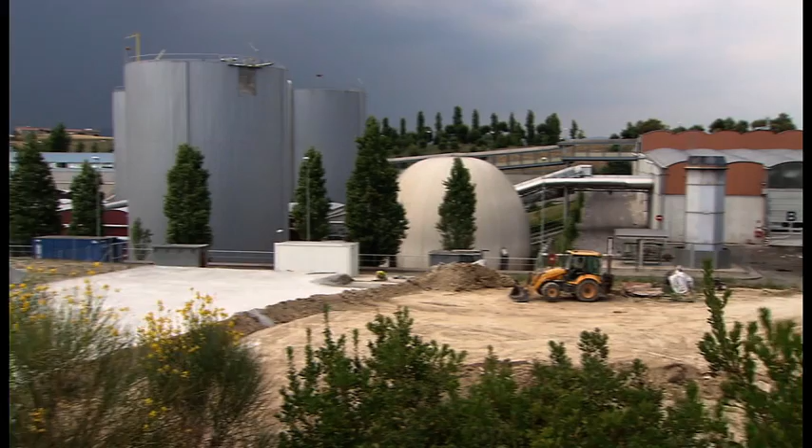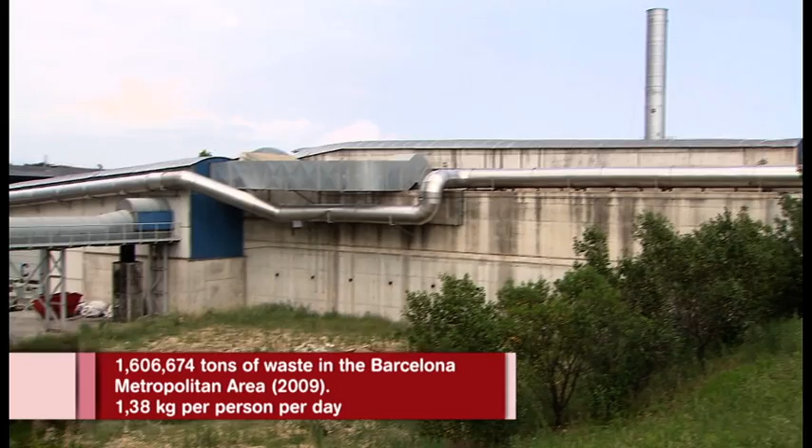The Montcada i Reixac Eco-Park forms part of the group of installations foreseen in the 2009-2016 Metropolitan Municipal Waste Management Programme by the Metropolitan Water Services and Waste Treatment Authority, also known as the Barcelona Metropolitan Area Environmental Authority. The Environmental Authority manages public services concerned with the integral water cycle and solid waste treatment in the Barcelona metropolitan area.

It serves more than 3,100,000 people in the 33 municipalities making up the area. The Montcada i Reixac Eco-Park itself treats the waste from Badalona, Badia del Vallès, Barberà del Vallès, Barcelona, Cerdanyola del Vallès, Montcada i Reixac, Montgat, Ripollet, Santa Coloma de Gramenet and Tiana municipalities, though it can accept waste from other places when necessary to guarantee proper management.

The Montcada i Reixac Eco-Park is a facility financed by the Environmental Authority, the Generalitat de Catalunya Catalan Government and the European Union, and can handle 287,500 tonnes of waste a year. The plant treats municipal waste from selective collection of organic waste, packaging and the residual waste from the municipalities mentioned above, with the object of turning organic remains into compost and biogas and recovering still usable material from all fractions for recycling.

At home, each one of us generates a large quantity of waste in the form of organic matter, such as food scraps, corks, or coffee grounds. So it can be treated and subsequently recycled, we must separate it correctly and put it in the right container, the brown one.

At the same time, we also produce other types of waste that cannot be recycled, like the dust from sweeping, nappies, or cigarette ends. However, this refuse also needs to be properly managed, which is why it has to be separated from the other waste and put in the container for the residual waste, the grey one.

The municipal dust carts are responsible for collecting each fraction and taking it to the treatment plant, in this case, the Montcada i Reixac Eco-Park.

These vehicles carrying organic waste and the residual waste to the plant go over a weighbridge before unloading the material. These entry and exit weighbridges provide a record of which municipality the lorry came from, the amount of waste entering the facility, and the recyclable and rejected material leaving it.

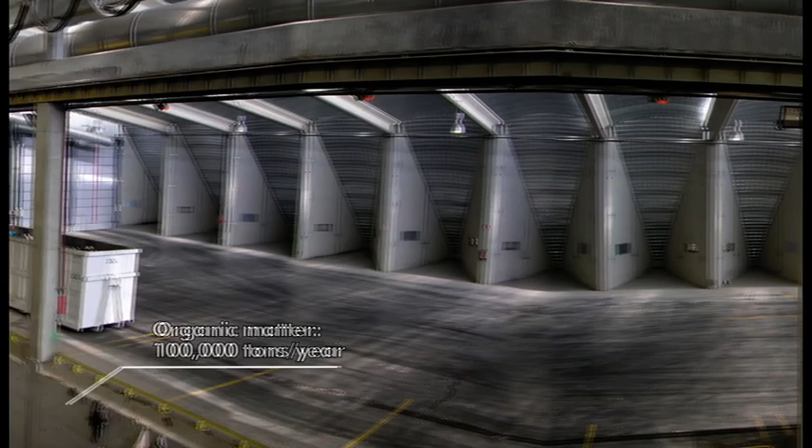Having been weighed, the trucks unload each type of waste into the corresponding unloading pit. From here, 2 bridge cranes feed it into the selection processes for organic matter and the residual waste, and after the unloading, turn the material over to prevent it from fermenting.

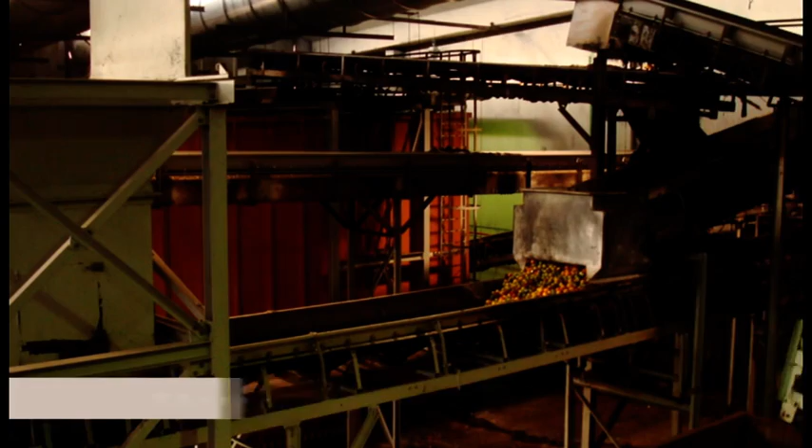The organic matter that has been separated out at source goes through a specific selection process to remove unwanted materials that are not organic remains and prepare the organic matter for entering the anaerobic digestion process, which will turn it into biogas.

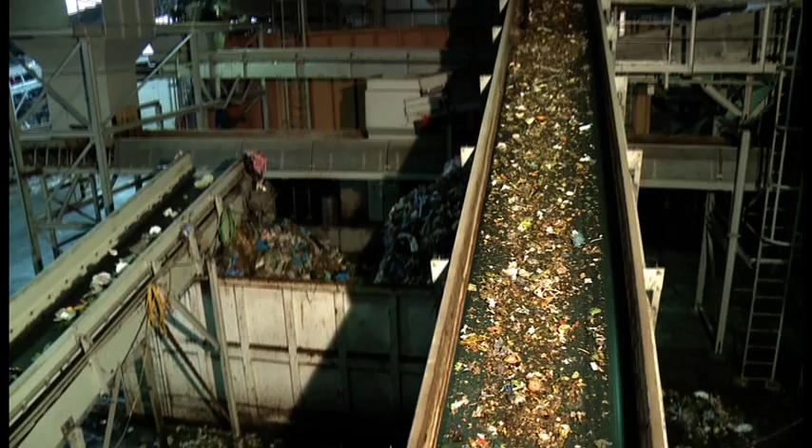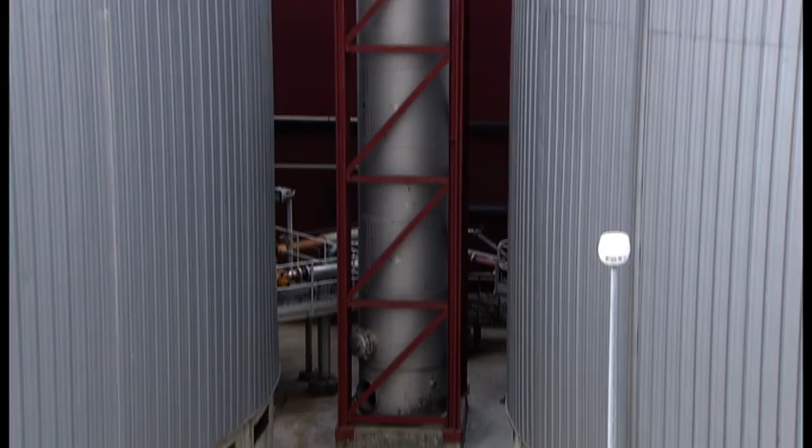The anaerobic digestion process begins at the mixer, where the organic matter is mixed with digestate and steam. It is then fed into the digesters so that the mixture can ferment under the action of different microorganisms. This fermentation gives off biogas, which is a mixture of methane and carbon dioxide and can be used as a fuel.

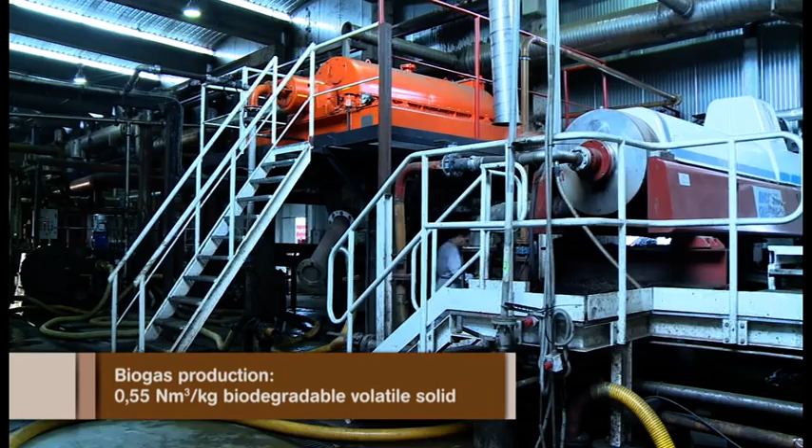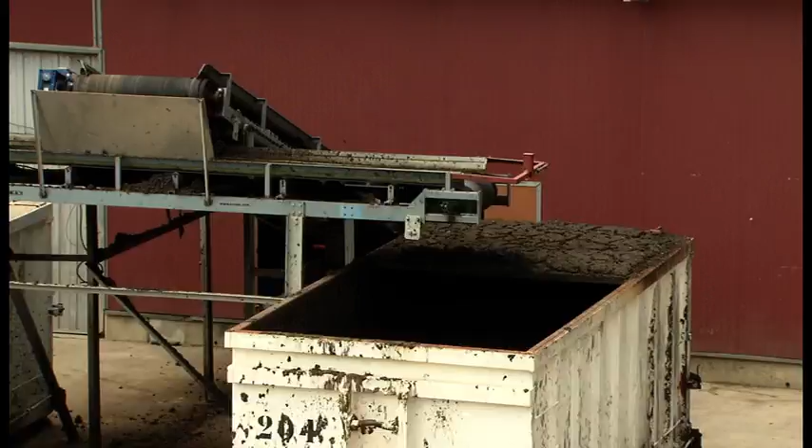By combustion of the biogas, the plant's cogeneration motors produce electricity and heat. The electricity is fed into the grid, and the heat is used to keep the digesters at the right temperature.

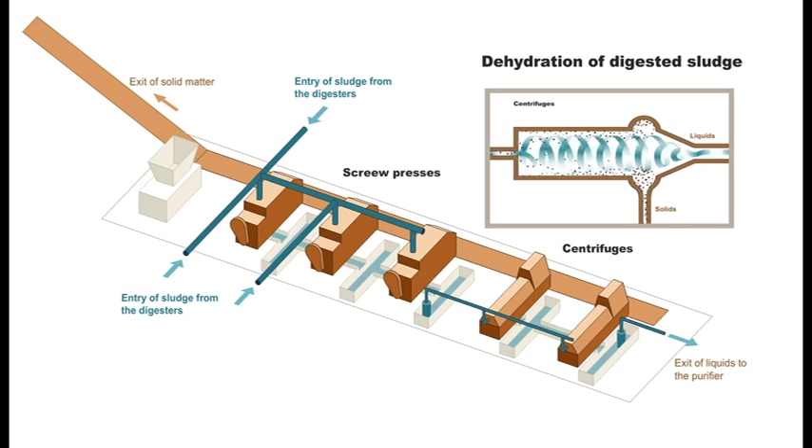The effluent from the digester, digested sludge, undergoes dehydration treatment and is then introduced into the composting process. The compost resulting from the digested sludge is of better quality than that from the organic matter of the residual waste. This produces a natural fertilizer which can be used in agriculture and gardening.

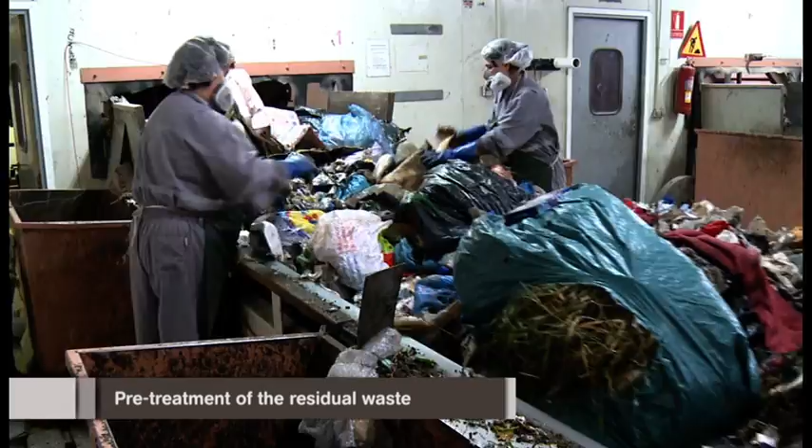In addition, during pre-treatment of the residual waste, still usable materials and the organic matter that has not been separated at source are selected and recovered by means of various mechanical devices. At the end of this process, the recovered material is pressed for transporting to recycling companies.

The organic matter begins the process of composting, through which organic remains are transformed into low-quality fertilizer, which can be used in building.

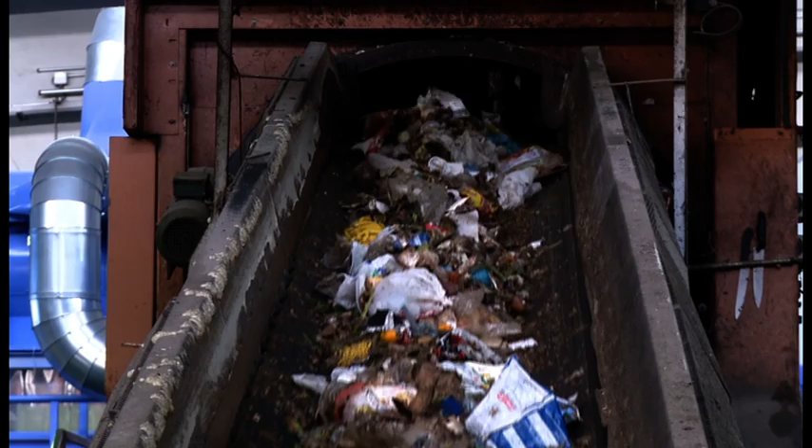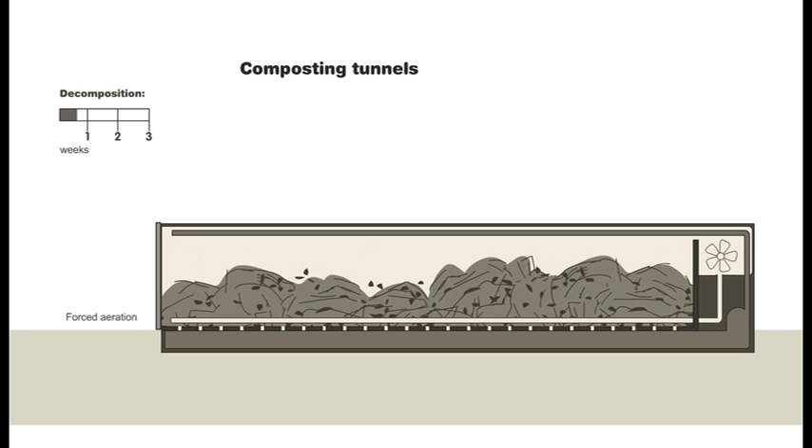The organic matter recovered during the pre-treatment process enters the composting tunnels on a telescopic conveyor belt and begins a period of intensive composting lasting 3 weeks. At the end of this time, the organic material begins a period of maturing lasting another 3 weeks into the windrow channels.

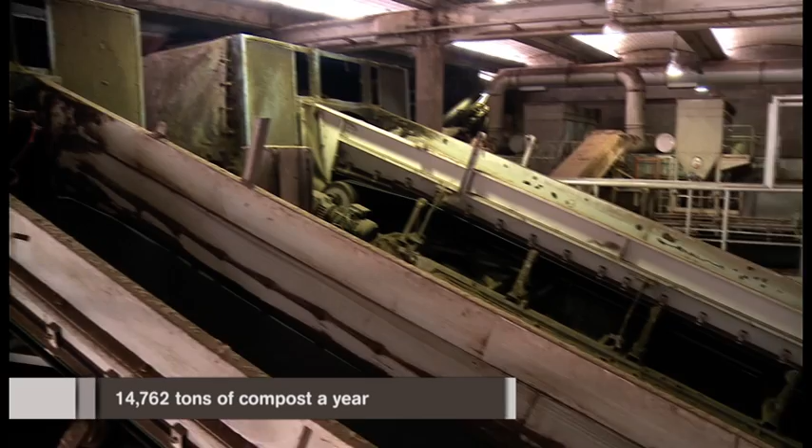After 6 weeks, the compost is screened to remove the impurities like stones or wood chips. This involves selecting the right particle size and removing any undesirable materials that may still remain.

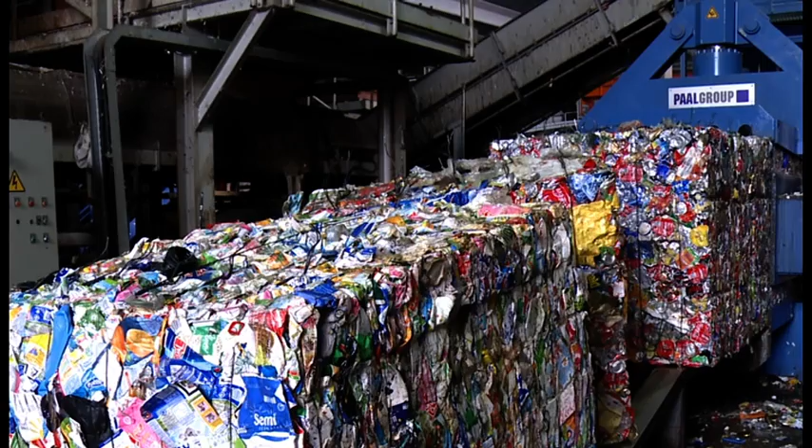The material that has been retrieved during the pre-treatment process of the organic matter and the refuse is sorted and pressed for transport to suitable facilities. The bales of recoverable material are ready for transporting to the relevant recycling companies who are responsible for transforming the material into new raw materials. The refuse bales, on the other hand, are transported to the corresponding final treatment facility.

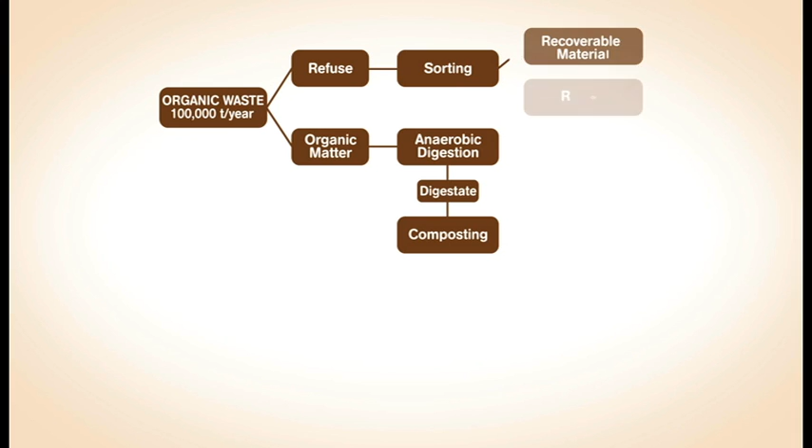As we have seen then, the Montcada i Reixac Eco-Park selects and treats waste from the selective collection of organic and rejected matter. Thanks to these processes, the plant obtains electricity and compost and recovers a wide range of materials ready for recycling.

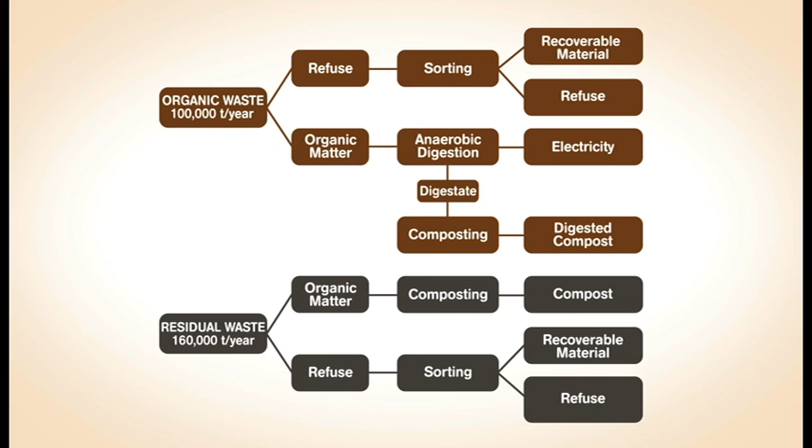Apart from treating organic matter and residual waste, the Montcada i Reixac Eco-Park also has a specific treatment line for packaging waste. Every day, each of us generates a large amount of packaging waste in the form of plastic bottles, yogurt pots, cans and cartons.

To help in the treatment and recycling of all this material, we first need to separate it correctly at home and dispose of it in the corresponding container, the yellow one. The municipal dust carts will see to the collection of this fraction and its transport to the treatment plant.

These vehicles, which transport the packaging waste from the yellow container to the plant, also go over the weighbridge before unloading the material so that a record can be kept of their weight and which municipality they come from.

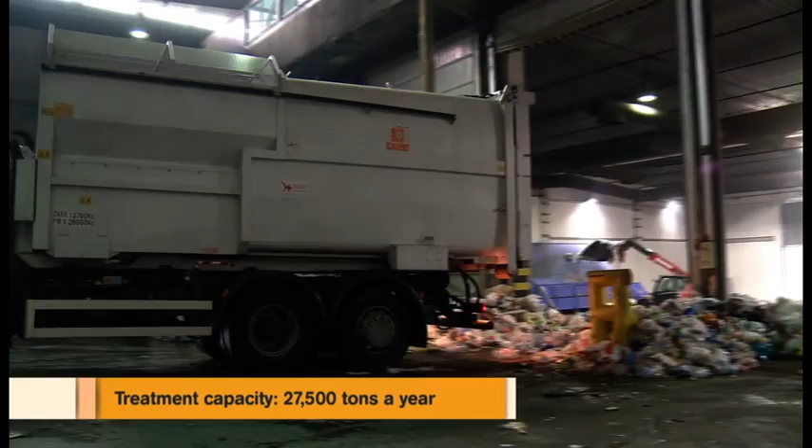Having been weighed, the trucks unload their material at the packaging yard. From here, a scoop regularly feeds the conveyor belt that takes the containers into the sorting process.

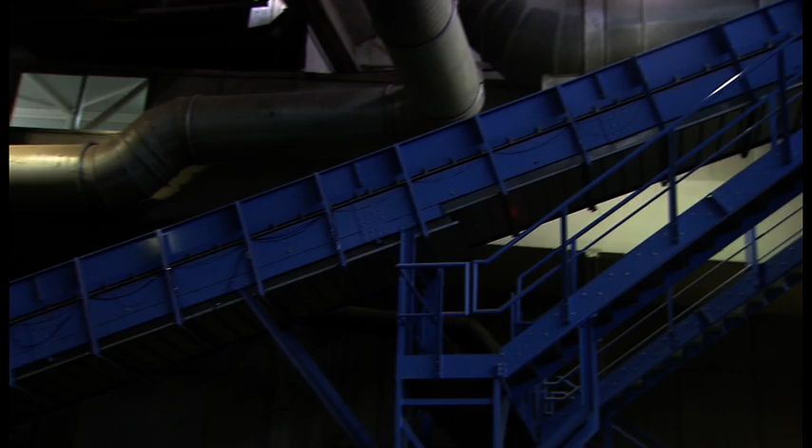In the container for the packaging fraction, we find recoverable materials with a very wide range of characteristics as regards size, weight, density, and raw material.

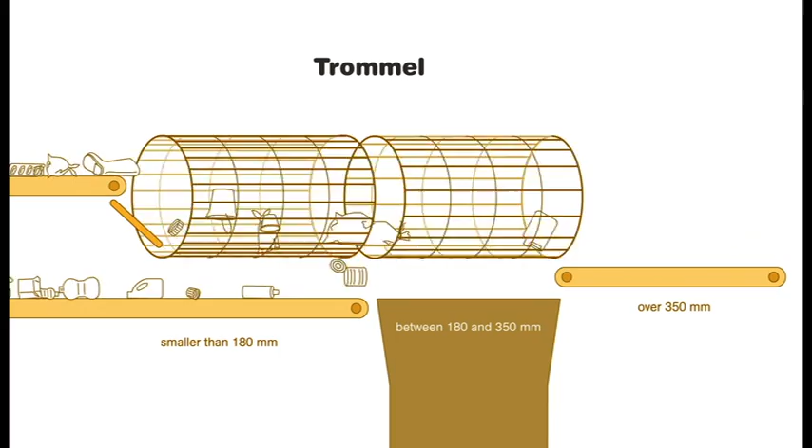In the first phase of the process, the packaging is selected according to size, allowing closed bags to be opened so that the material they contain can continue through the sorting process.

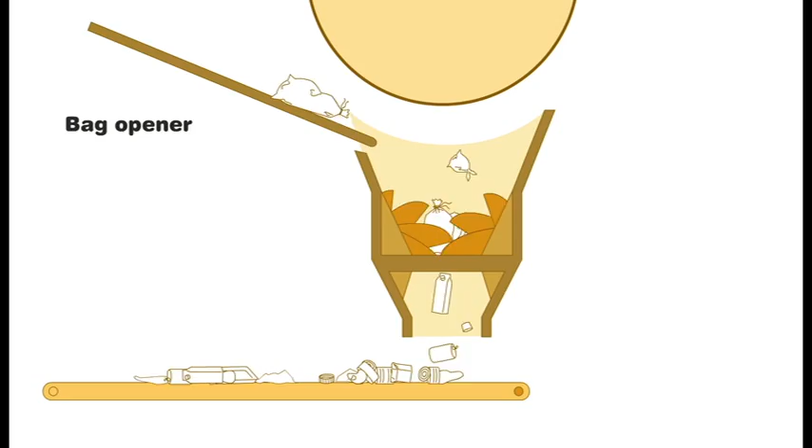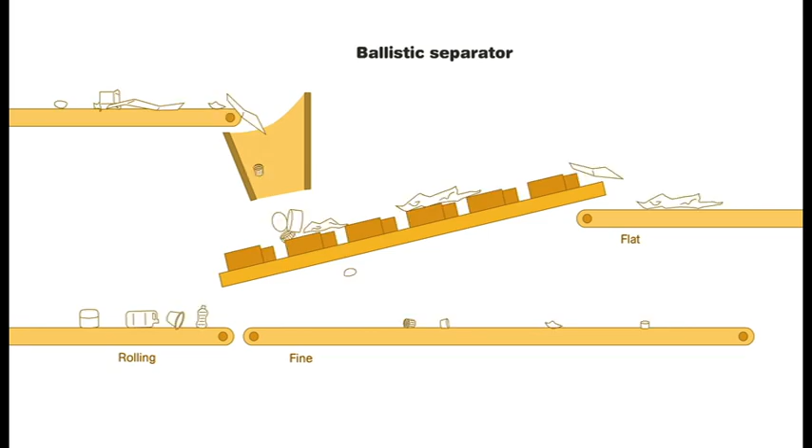Once all the packages have been removed from the bags, the process continues with separation according to shape. The packaging enters the ballistic separator, where it is separated into fine, flat, and rolling fractions, and each fraction subsequently goes through a specific treatment process.

Small light materials can hardly be classed as packaging. In this case, the belt goes through a magnetic separator that removes any ferrous material.

Lighter materials, like plastic film bags, go through a classification process made up of optical and mechanical systems. The optical sorter identifies the materials, which are sorted into types by an air current, and then go through manual quality control.

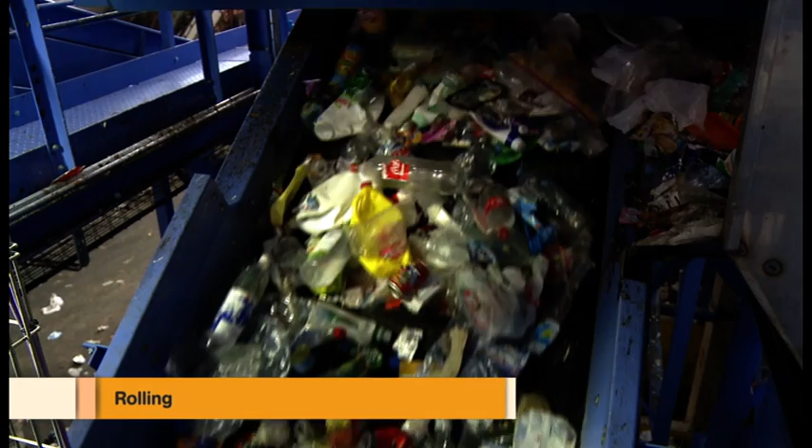In the rolling fraction, we find most of the more commonly used types of packaging: bottles, cans, and cartons. In this process, sorting is done by type of material, depending on whether it is aluminium, iron, or plastic.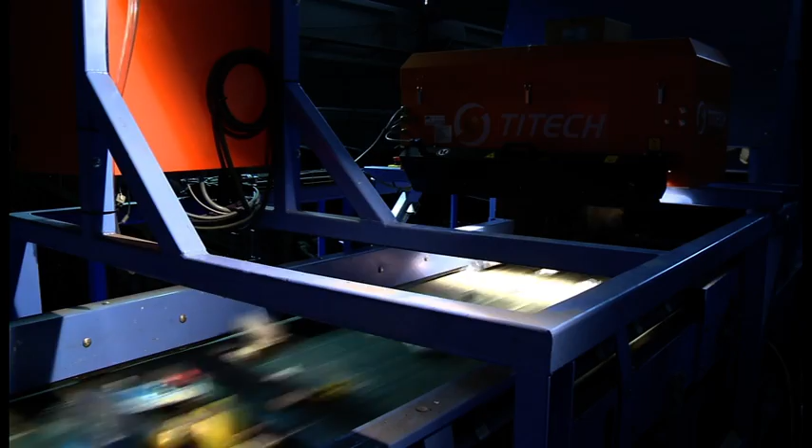On one hand, iron and aluminium packaging is separated by mechanical devices such as the electromagnet and the Foucault separator, respectively. On the other, plastic is sorted using optical and mechanical elements.

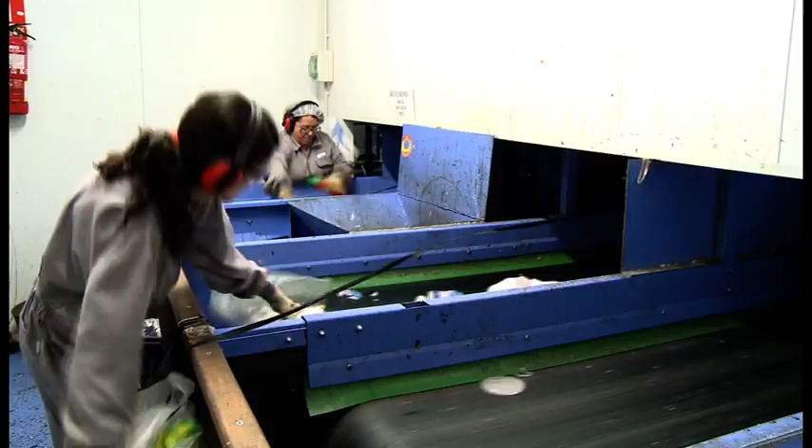The optical separator identifies the materials, and these are separated into different types by means of an air current. The selected material goes through sorting cabins where a number of people check the standard of the separation.

Once the sorting process is complete, the packaging is compressed according to the type of material and taken to the storage area, from where it will be sent to the different retrieval centers to be turned into new raw materials. The resulting refuse bales, on the other hand, will be taken to the corresponding final treatment facility.

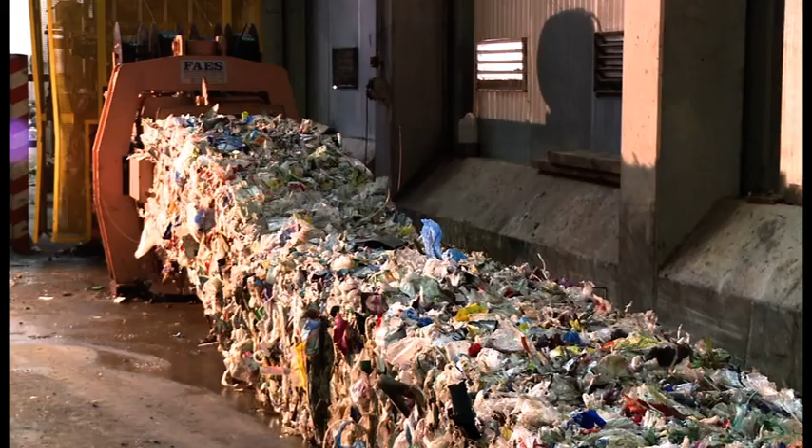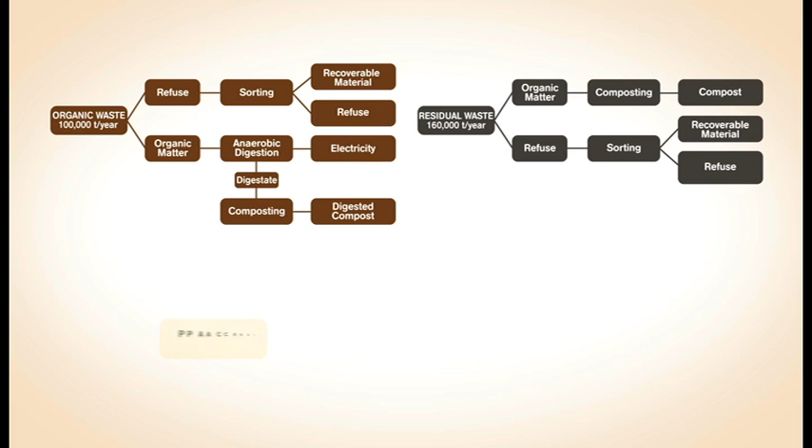As we have seen then, as well as organic matter and residual waste, the Moncada y Reixac Eco Park also selects and treats packaging waste from municipal selective collection. As a result of this sorting procedure, the plant recovers a wide range of material ready to be recycled.

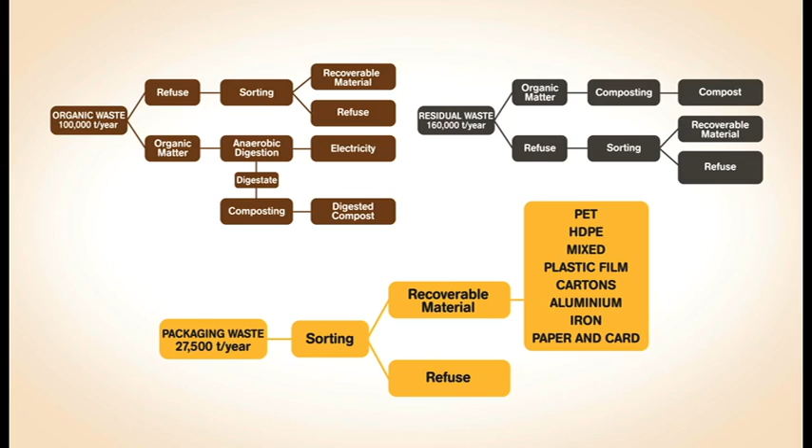The Moncada y Reixac Eco Park incorporates a series of measures to control the environmental impact of its activity, the main ones being air and water purifying and minimizing the impact on the landscape.

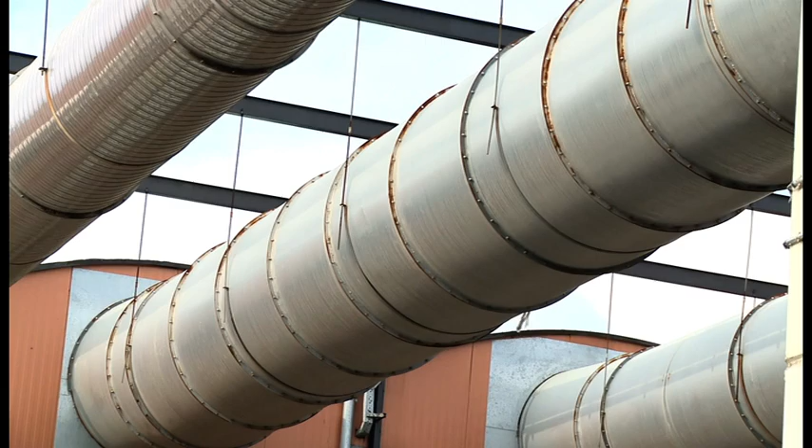The air in the different buildings of the plant, which picks up smells and dust, is purified before being returned to the environment. Large ventilators draw air from inside the buildings through a network of tubes and take it to the air cleansing zone.

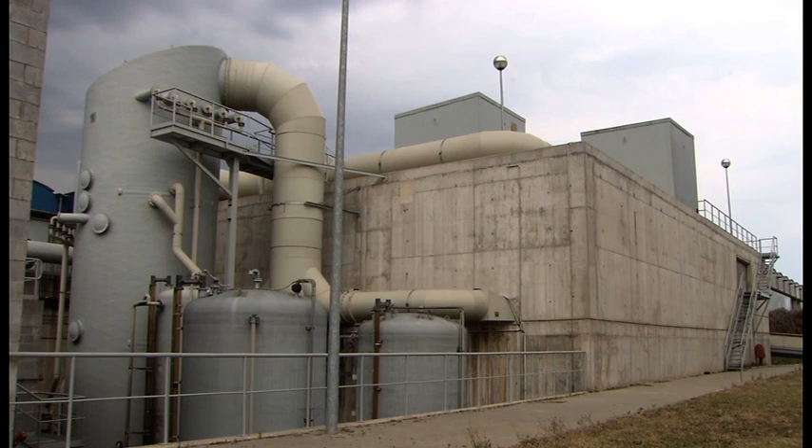Some of the contaminating substances are neutralized using chemical cleansing systems, and biofilters break down the substances that cause smells using a biological filtration process. Finally, the clean air is released through a chimney.

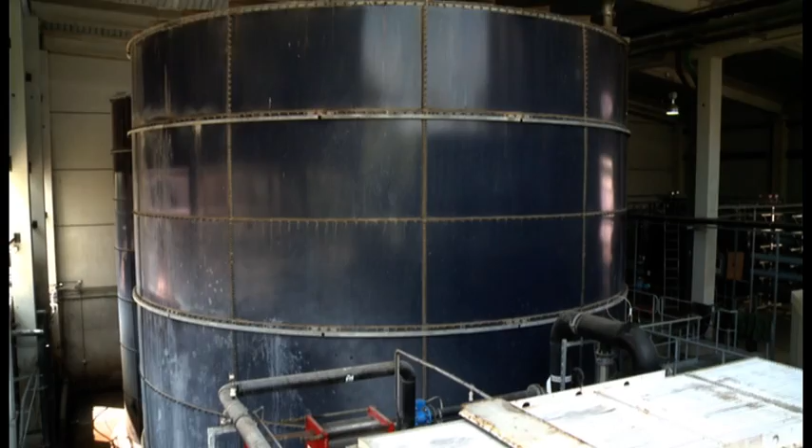Water is a key element in the processes of the plant. The Montcada i Reixac Eco Park has a storage lagoon for collecting rainwater, enabling it to reduce consumption of piped water, and a water treatment plant to clean the wastewater from the plant's different processes. The installation is able to reuse the treated water in the organic matter composting process.

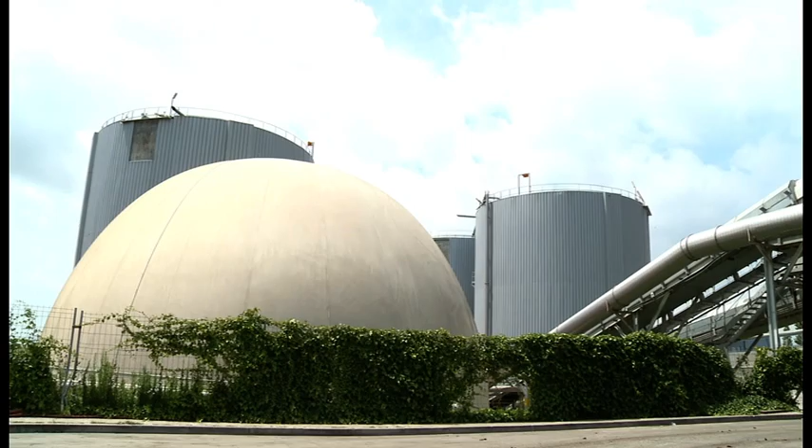The Montcada i Reixac Eco Park forms part of the Environmental Authority's network of installations, whose goal is to provide citizens with a public service attentive to regional particularities and respecting sustainable development. To achieve this, however, it is essential to have the cooperation of the whole of the general public.

By making small changes in our habits, we can help to make management of our waste easier and more agile, buying as little packaging as possible, separating waste at home properly, and placing it in the right containers, or giving a new lease of life to those materials that are still usable.